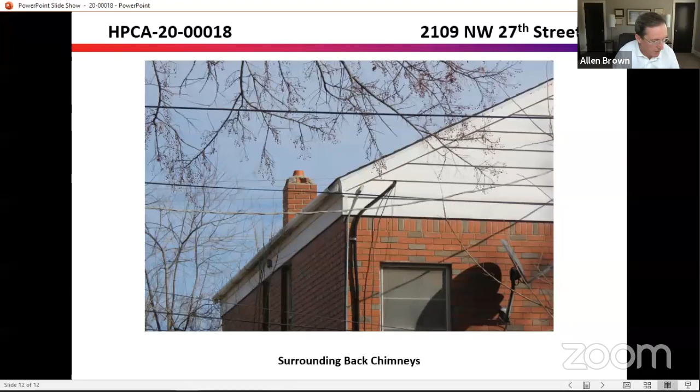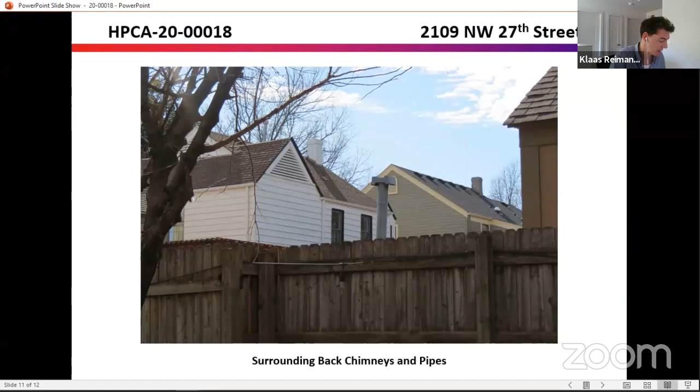John did a good job. Thank you, I appreciate that. I concur, I don't see any specific issues, and staff has recommended approval, so I don't have any further comment.

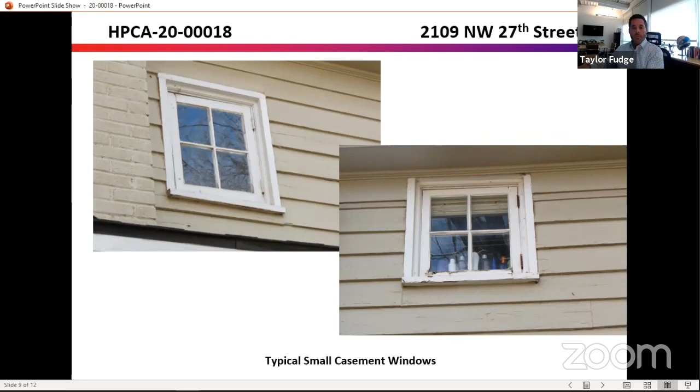Any comments from any other commissioners, or is there anybody else that would like to be heard in regards to this particular item? Or do we have a motion?

I'll make a motion to approve item HPCA-20-00018, with the specific findings as noted in the staff report. Second. Moved by Klaas Reimann-Philipp, seconded by Allen Brown. All commissioners, please vote.

It looked like the motion was approved. Did I miss something?

I have not been getting the summary screen that shows the votes. I've just been getting the verbal confirmation. I don't know if you guys are getting that screen or not. I was getting it, I don't see it now. I'm not getting it either.

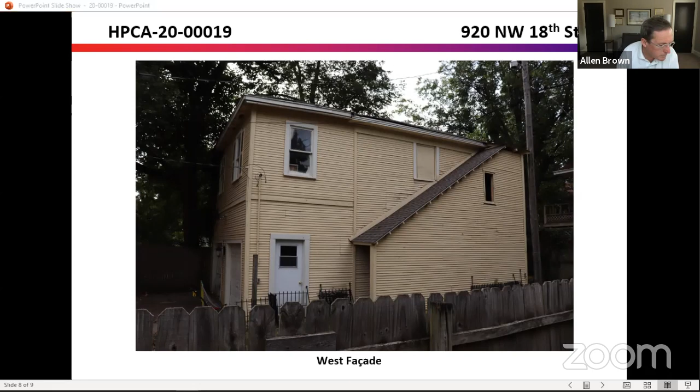Is there a site plan elevation available? Both are almost completely out of view, maybe from the rear. You might see it from the abutting neighbor, but it's pretty hard to see. And there's a huge forest of bamboo on the east side.

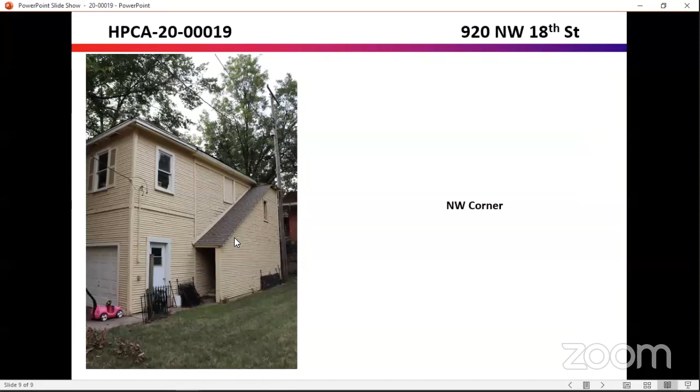We do not have a site plan as part of this packet. Is that correct, or am I not seeing it? I see a floor plan originally submitted, but there was a site plan originally submitted too. Not sure if it's part of this packet. Refresh my memory, is this a new garage built on the old foundation?

The short history is we were trying to save the structure, and once we got all the contents out and saw the foundation, it wasn't savable. So we went back and submitted for a demolition and new construction of the same structure, same footprint. And then we ran into the fire code issues once we were going through permitting, and that's why it was continued.

Katie, we also, if I remember correctly, Jeff evaluated that this likely was either not the historic garage you're replacing, or was a historic garage that had been dramatically altered previously. That's true. You can kind of see where there was a smaller original footprint, and then a pretty big addition was put onto the north end, the driveway-facing elevation. So it's been modified quite a few times over the decades.

This is Linda Schultz. Jeff, the staff report said that among the specific findings were that methods other than removal of fenestration may be available to acquire firewalls. Have you all had that discussion? I'm just sort of curious. I mean, when it says that, I'm not really sure where the discussion is.

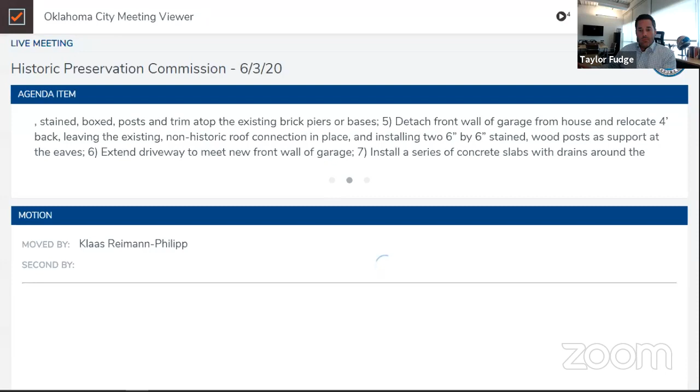Okay, we've got a motion. We need to get all the other items in there too. Or—mine is not moving. Were you doing that separately, Linda? I don't have the second. I thought somebody else seconded that. Maybe I just misheard. I'm sorry, I seconded it. Did you hit the button?

So item moved by Klaas Reimann-Philipp, seconded by John Milner. All in favor, please vote.

Mine doesn't show the second. Mine didn't either. But I got to vote. There we go, there it is. Okay, items 3 and 4 have been denied.

How about items 5, 6, 7, and 9?

So was there consensus on item 5 to move the entire wall back 4 feet, including the roof? Was that the direction it was going? I thought it was to totally detach it from the house. I thought it was that, got kind of confused for me, but Katie had interjected and offered that the staff could work through that. Well, I thought, Klaas, you guys are talking about detaching the roof from the house.

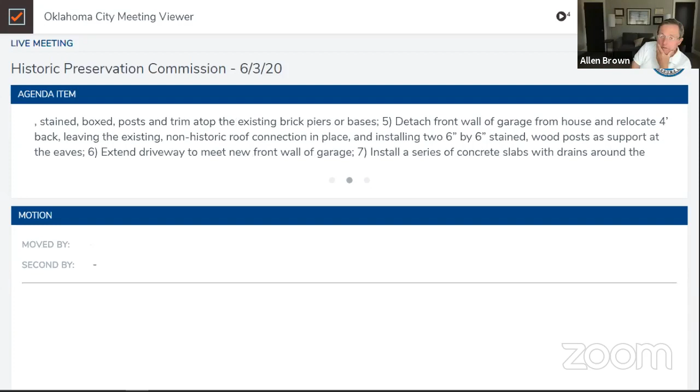You know there's a deadline next Tuesday, right, for new material? Oh, yes, we would need any new material presented for the July 1 meeting by Tuesday of next week. This may be more of just a discussion and not so much new drawings and documentation, so we'll work with the applicant on that. Right, want to make sure we knew that.

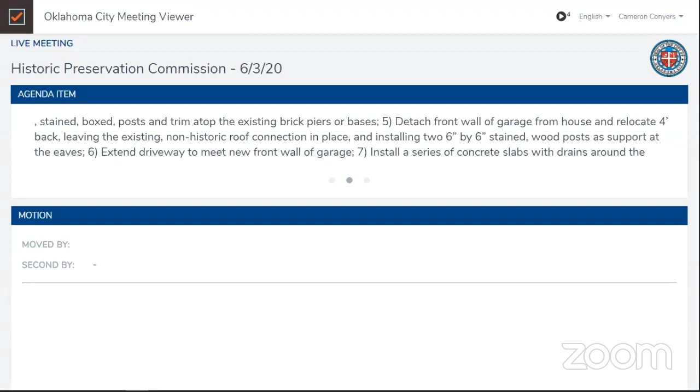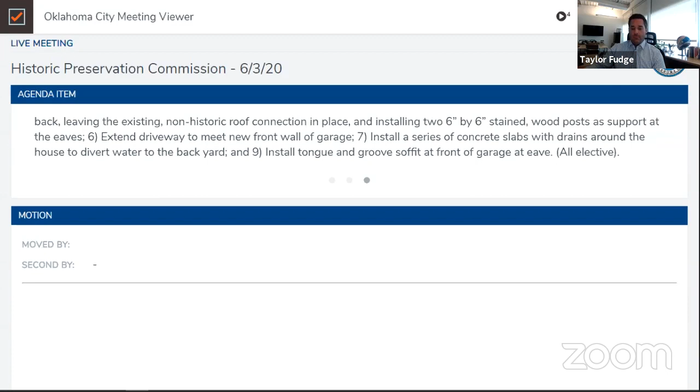Okay, do we have a second on that particular item? I'll second. Okay, moved by Linda Schultz, seconded by Ann Zacharitz. All in favor, please vote on PrimeGov.

Okay, item number 7 has been deferred to the next—what is that date again, Katie? July 1. To the July 1 meeting.

Mr. Calhoun, thank you for all this information in the packet. Thanks for the conversation, and I think we've wrapped up this particular case. Thank you for your time today. Thank you guys very much. And it sounds like I'll see you in about a month.

There we go, excellent. Okay, next item on the list, HPCA 200061 at 908 Northwest 38th Street. This is in Crown Heights, Ward 2, consideration and possible action on application by Shabazz Ahmad, Dream 405 Investments, for a certificate of appropriateness to: 1, construct addition, elective; 2, construct garage and install driveway, elective; and 3, remove driveway, elective.

This is a house similar to one that the commission saw fairly recently that has an attached garage on the front elevation of the house that is very small and no longer really functions as a garage. The applicant has proposed to construct a detached garage in the backyard with a new driveway accessing that detached garage.

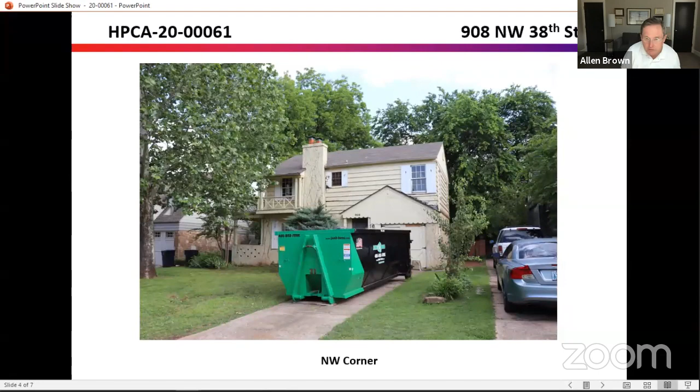Got a question on the front north elevation, the garage doors. I don't understand, the photograph looks like two existing doors that are hinged. Yes. It says existing window. Is there a window in there? There's not, I think that's for the window above.

Let me check. Window above where? The note says existing window above. The doors have that crossbuck style on the bottom panel. It's not referring to the window there, it's talking about the window above on the second story, not the garage. I think that's what the architect is referring to.

So what are you planning on doing with those garage doors? We're gonna replicate the exact same style, just add windows to it. So the existing ones don't have windows, but you're proposing new windows that do? Yes, new doors that do have windows on an upper section. Yes, that's correct.

Depending on what we approve here, the proportion of those should be the same as existing, the bottom section and the top section of those doors, and the drawings don't show that. They also have muntin bars on the new doors, which the design doesn't look appropriate to me. I think that needs to be studied, those new doors, to be closer to the existing design, proportion, everything. Yeah, we plan on that.

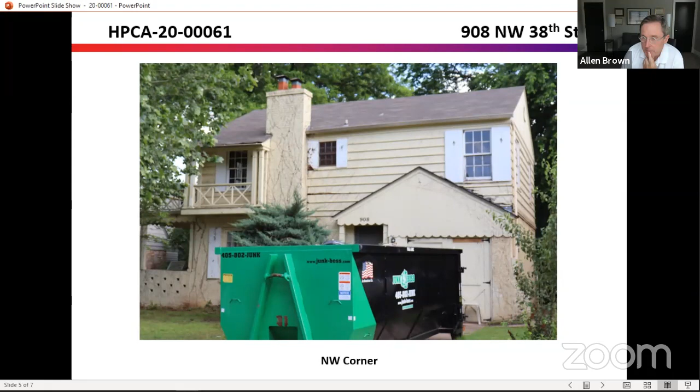Again, you guys agree? Yes. Okay. All of that can be submitted to staff if you're comfortable with that. Yes, but we would want it in the motion. Okay, do we have a motion on this particular item?

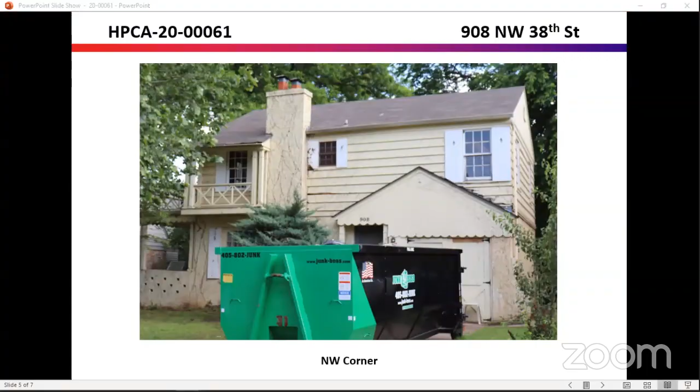I move we approve item D5 with the specific findings in the staff report, with the condition that the applicants submit documentation on the existing garage doors and the replicated garage doors. And the condition for the muntins? Yes, and that the upper section of the garage doors does not include muntin bars on the glass portion.

So Allen, are we making a motion to approve the other items as well, in terms of constructing the addition and removing the driveway and all of that too? I thought everybody was comfortable with that. No, I'm comfortable with it, I just wanted to make sure. That was my intent. Perfect.

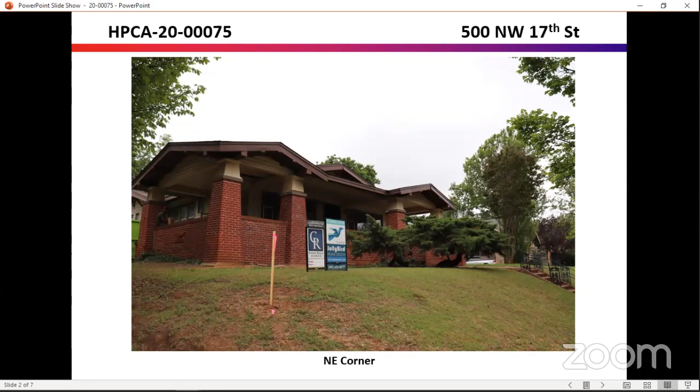Okay, perfect. So the next item we will hear is HPCA 20-00075 at 500 Northwest 17th Street. This is in Mesta Park, Ward 2, consideration and possible action on application by Chad Rice, CR Homes LLC, for a certificate of appropriateness to demolish an existing non-historic garage and construct a 2-story garage and appurtenances.

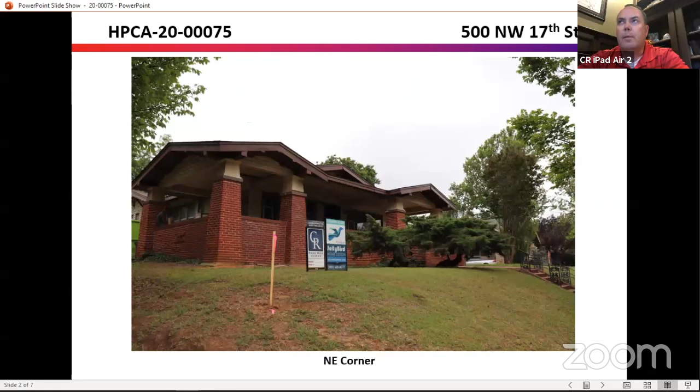And this looks like relatively new construction in terms of the garage that's currently there. It was approved in November of '16 and construction was completed in the early part of '17.

How does this, maybe this is a question for Katie or Angela, but how does the size of this particular garage fit within current guidelines? Is it within scope? Is it too large? Is it small? How does it fit?

This is Katie. The proposed new garage is a 450 square foot footprint, which is the size that the guidelines typically allow. It's kind of a threshold size for new construction garages. And it's also a two-story garage, which the guidelines address in terms of when and where two-story garages are appropriate - when we don't know what the historic garage was, but generally the rule of thumb is that when there's a two-story garage at an abutting property, or when two-story garages are predominant along the block, then a two-story garage is allowed.

Am I looking at a two-story garage to the left of that photo? Yes, there are several two-story garages in the area and immediately abutting this garage, including that turquoise one, I guess.

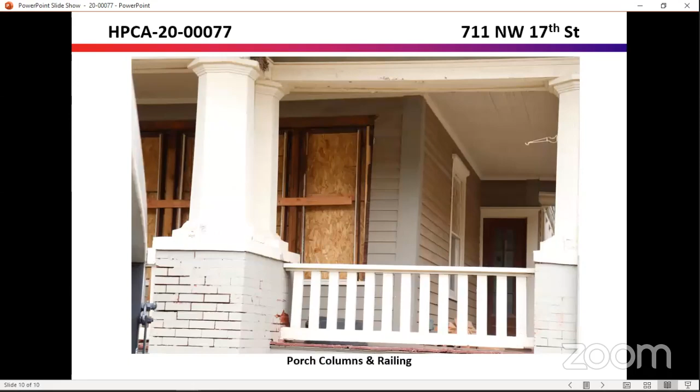Perfect. Is the applicant present? I am. Talk to us a little bit about your project. Sure. So we live in Mesta Park and we love it so much that we wanted to reinvest in our community. We're restoring the property to resell, and the carriage house has been examined by a structural engineer. He classifies it as structurally unsound, so we would like to tear it down and put in a modern day garage. We have based our plans off of other garages that share the alleyway, but we are not married to these plans if the committee does not like them.

Questions from fellow commissioners? Well, let's address the issues. Linda, did you say something earlier? Ms. Kelly? Did you provide us with the engineer's report and I missed it?

The package, it is page 3, I believe. Oh, yes, it is. I'm so sorry. Thank you. And I also received an email from him to further clarify. I'm happy to forward it to anybody who would like to see it. He would classify it structurally unsound, with the potential for collapse with high winds or snow loads.

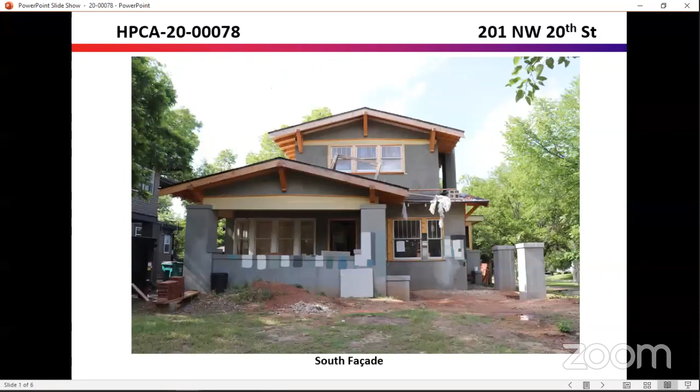This is Katie. I just wanted to ask one more question as staff. I may just have missed something in the proposal, but as far as not continuing the west driveway all the way back to the structure, I think we would just need a revised site plan that shows exactly where that paving is going to stop. Unless Catherine, is that something that we already have and I'm not seeing it here?

No, we would be happy to modify that and send it to you. And then I just wanted to call out that widening that driveway all the way up to the stem wall of the house is going to fill in a little inset along the side of the porch, which is what we reviewed on a very similar proposal earlier today and continued, asking them to consider alternatives for addressing drainage issues. So obviously we review all of these case by case, but I just want to make sure we're consistent in how we evaluate filling in those little niches with paving.

Well, I see a little difference there, Alan, that they're just talking about going right past the pilasters. Is that correct? Correct. So there's really not much to fill in there. It doesn't look to me like, is there? Or am I missing something?

Well, Katie, it's kind of tough to tell because I didn't see anything being filled in based on the existing plan. It kind of looks from the site plan that it's up against the wall, but that might be the roof overhang shown obscuring what's happening. There are, so the footprint, let me see.

I think you're right, Klaas. If you look at the county assessor footprint on the page just after the application page in your attachments, you can see that there's the front porch, and then it goes straight back along the side of the front porch, and then there's a little bump out, a little 4-foot bump out. There's steps that extend out from the front porch, and then between those steps and that bump out, there is a little, what looks to be right now, landscaped, unpaved area, I'll say.

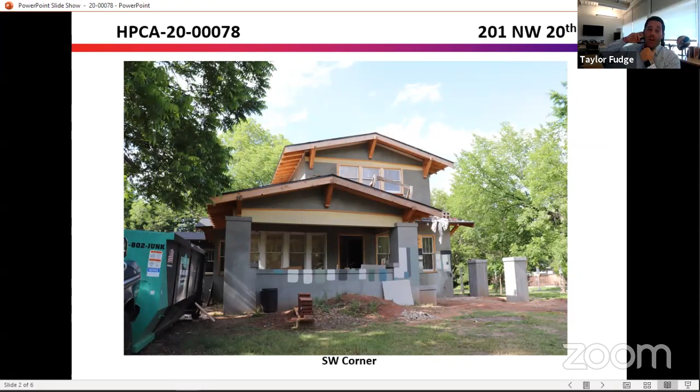Do we have a motion? Or do we have any other citizens that wish to be heard on this particular project too?

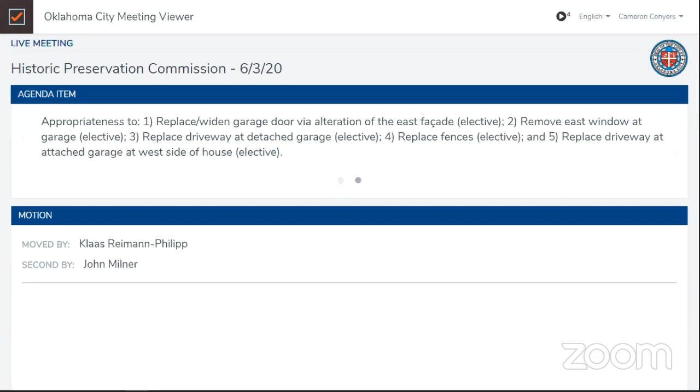Looks like we're looking for votes for Klaas and Ann. I apologize, I made a motion, okay, but then I can't vote on it. Exactly. Okay, well, motion passes, and thank you guys for the conversation. Thank you, thank you, thank you.

Okay, last one today. Item D11, HPCA 20-00079 at 717 Northwest 41st Street. This is in Crown Heights, Ward 2, consideration and possible action on application by Hallie Reeves for Betsy Brunstetter for a certificate of appropriateness to 1, construct addition elective, and 2, install window at rear of dwelling elective.

This is a new application that the commission hasn't seen yet. Staff did recommend approval, just with a condition regarding making sure we have all of the accurate and fully dimensioned floor plans, site plans, et cetera.

Let's see. I think some of the notes that we have is this appears to be a pretty modest addition on a corner lot. It doesn't look like it's anything crazy, but as Katie noted, a full site plan for certificate of appropriateness and permits would obviously be very, very helpful. But talk to us a little bit about your project.